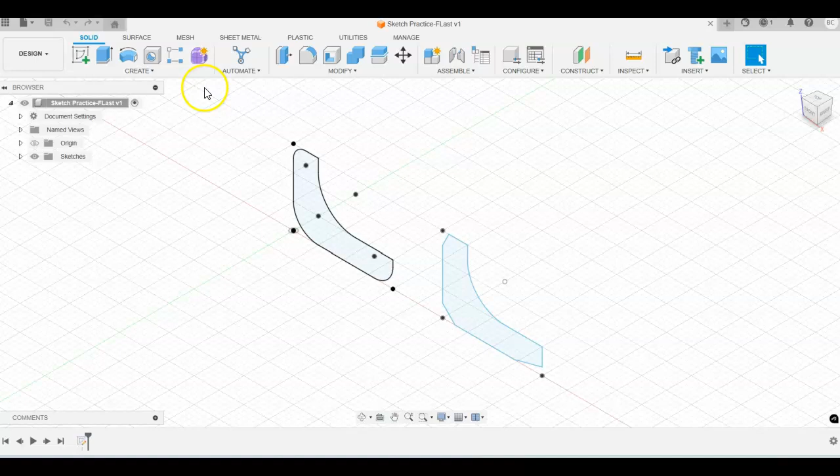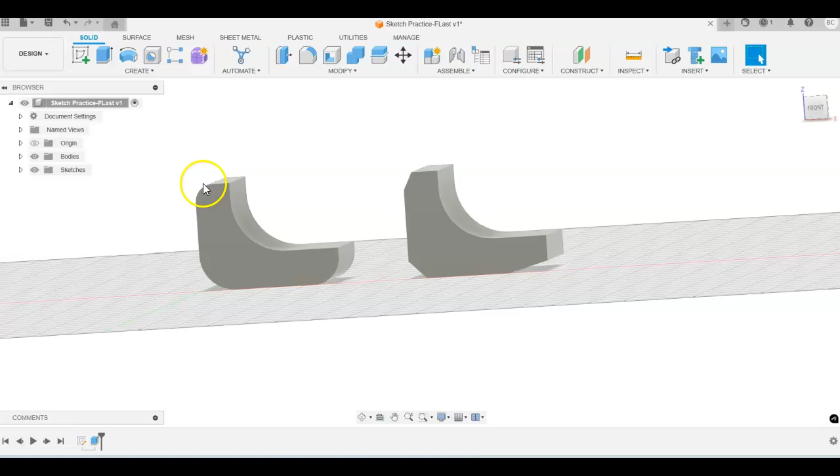So we're going to extrude these back now. We'll take this sketch practice file and extrude both of these. We'll select both and extrude them back 1.5 inches. Now I want you to notice as we look at these, the fillets and chamfers were basically copied over and became part of the actual extrusion itself.

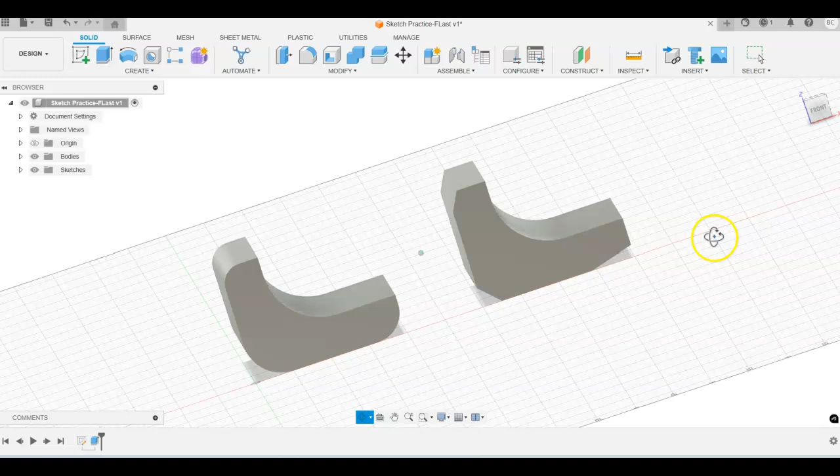So there's a bit of a difference in the way these are generated. In the past, if you needed to make a change to your solid model, fillets and radii on parts often get changed—after the part's been in service, they realize they need a larger chamfer or bigger radius for lead-in, or smaller because things got hung up from being too big. So those features on a part are frequently changed from one point to another.

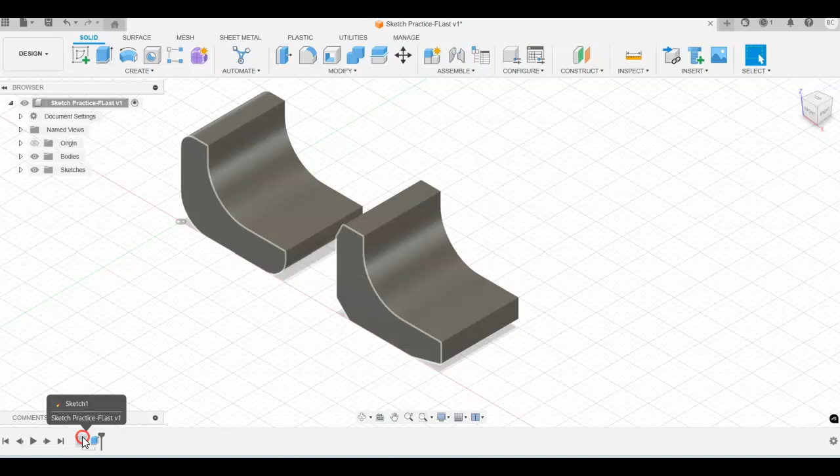So we're going to demonstrate another way to actually do this and generate this out as well. Remember, part of what these activities are designed for is to get you used to using the software package and going through all the tools. So I'm going to go back in, re-edit, and come back over here to the sketch. I'll right click, edit sketch.

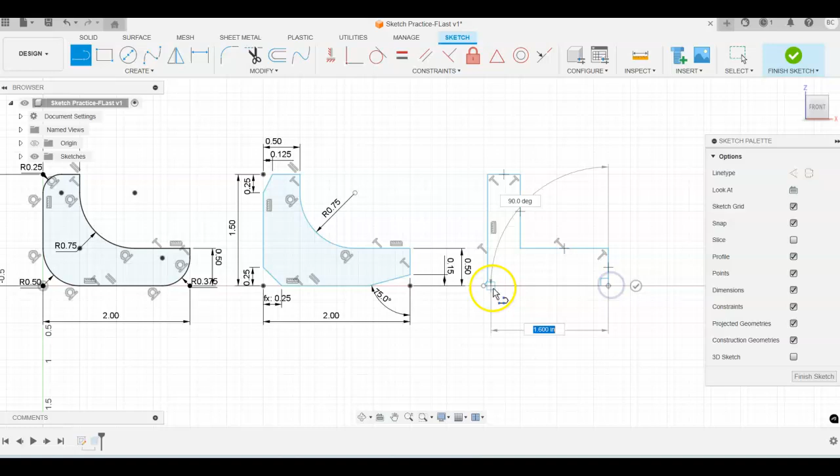We're going to create another sketch here to redo all of this. Again, I'm not too concerned with dimensions at this point—we'll just put everything in place, maintaining the construction of this. Now notice I said that, but it kind of double-lined, so not a big deal. Let's see how we can fix this here.

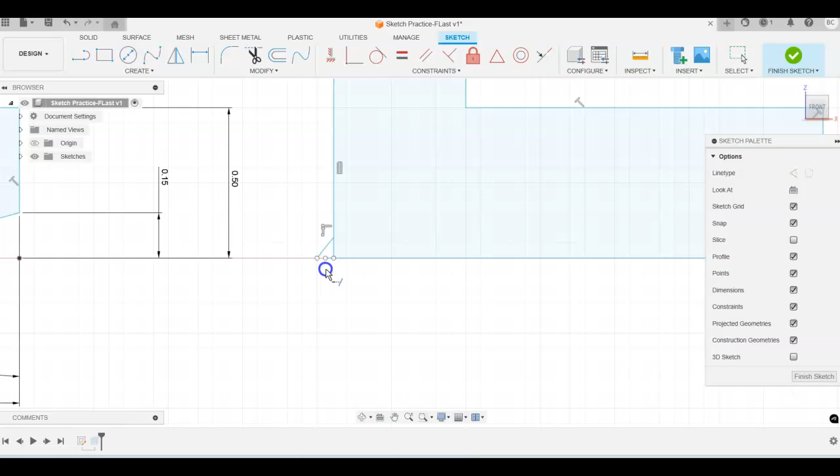I'm going to use my modify extend tool, and extend that line down to there. Now that leaves me some points, so I'm going to trim off this and that. So there's my surface using the modify extend tool.

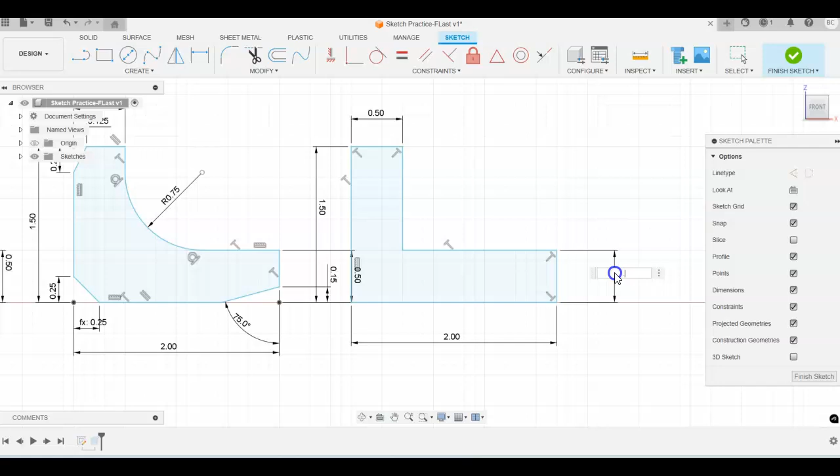Now I can go ahead and dimensionally constrain this, and we want the same dimensions. So this is going to be a 1.5 dimension, this is going to be a 2-inch dimension, and each of these are going to be 0.5 and 0.5. Okay, so we'll go ahead and finish that sketch out.

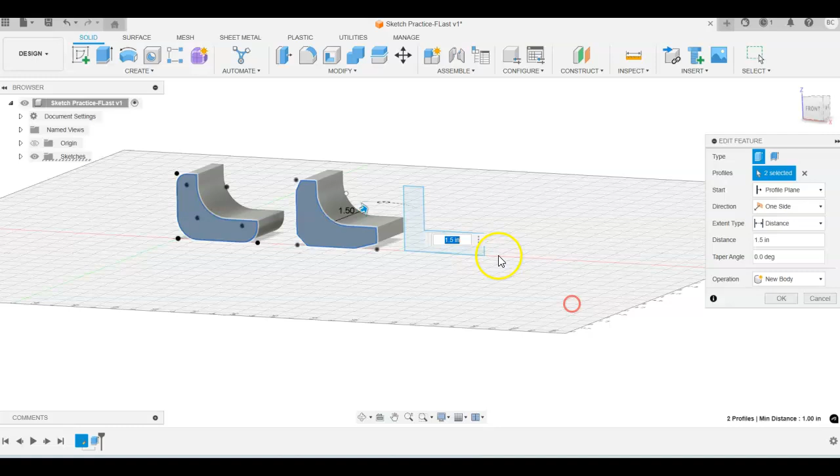Now that sketch disappears because it was part of the sketch that was consumed by the original extrusion we did a few minutes ago. So if we want that, let's go back in and edit this feature—it brings it back out. Now I can add that to the actual extrusion, and we can keep that and make it a part of it too. So now I've got these three different parts.

And you can see the differences between the 90-degree corners versus the chamfer. Now I'm going to use this one to show and do the actual chamfer tool. So let's come down here—as we take a look, actually the first thing is the radius or fillet tool.

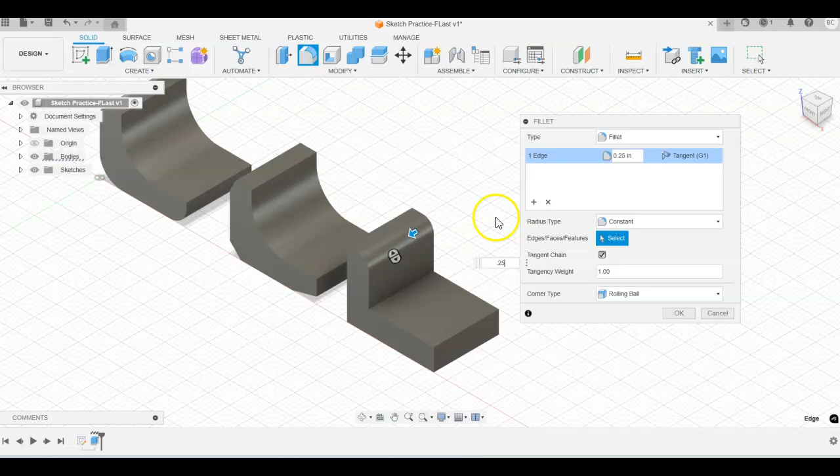So we're going to go ahead and put a fillet on each of these edges. Notice, so there's the first one—we'll go ahead with 0.25. I could do these individually, or I could do these all at the same time, either way. Let's come back down here, select fillet—each of these edges are going to be a 1/4 inch fillet. So there is the fillet tool and how we would be able to use that to make that a part of it.

Just like in our sketch tool, I also have the ability here to move and copy. In this case, I'm getting the move and copy tool right up on the modify panel. Notice when we select bodies, it gives us a choice: do we want to move components, bodies, faces, or sketch objects? In this case, I'm going to select the body and move it in the X3.

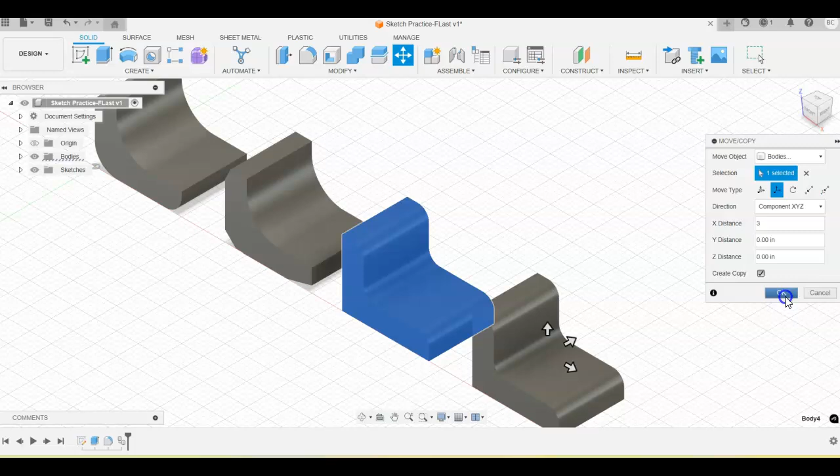I want to create a copy, so we're going to create a copy. Notice the differences here between move and create a copy. Let's go ahead and hit OK. Now I've got two of these.

Now I've got the radii. Notice this would be called a round. This would be called a fillet, because these are outside radii and this is an inside radius. So this is called a fillet, and these are called rounds. Just some standard terminology.

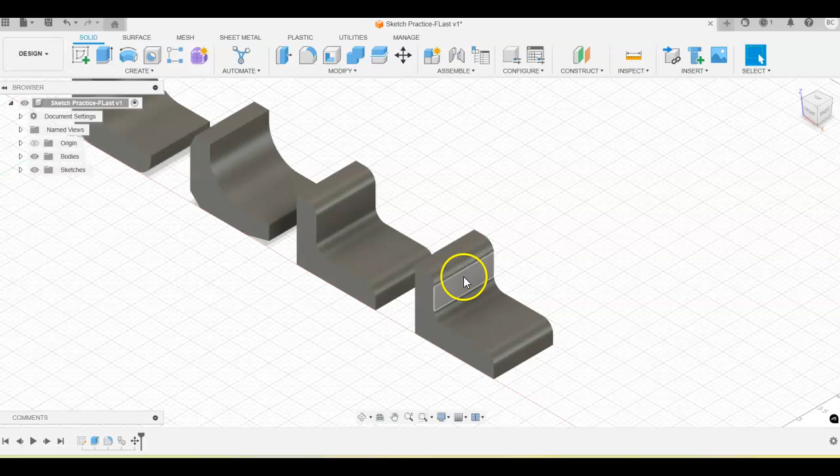Now I want to go back and create a chamfer. At this point, if I click on that feature, in this case the radius, right click, and delete, it'll take it back to the 90 degree. To put the chamfer on, it's pretty much the same thing. I'm just going to use the chamfer tool, select the edge. This is an equal distance, so we're going to make that 0.25.

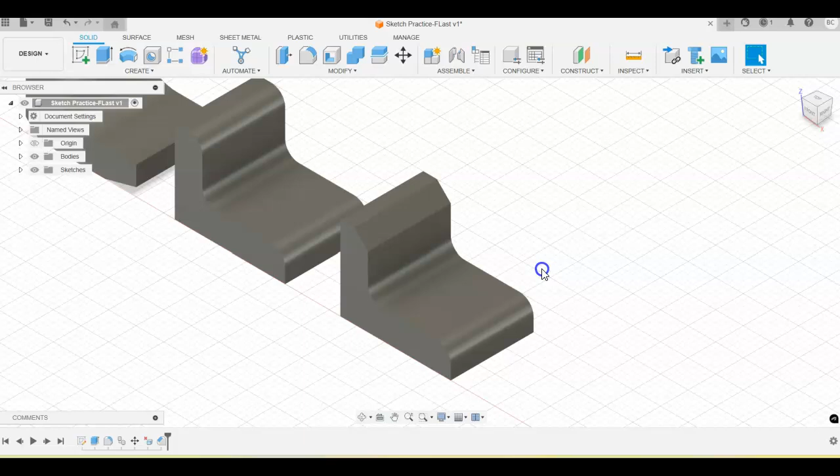There's my chamfer on it. Now I'm keeping the rest of this with the fillets here just so you can see, because we're going to use the chamfer tool one more time. Notice I can select this whole edge, and we're going to chamfer this whole edge with a 1/4 inch chamfer.

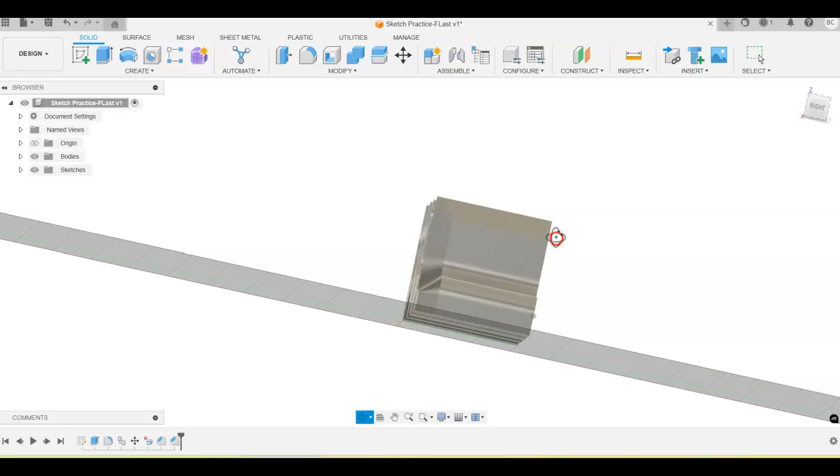Now notice, so long as I have those tangency points and I maintain that, look at the results. It's a nice smooth transition. That's a nice feature on that.

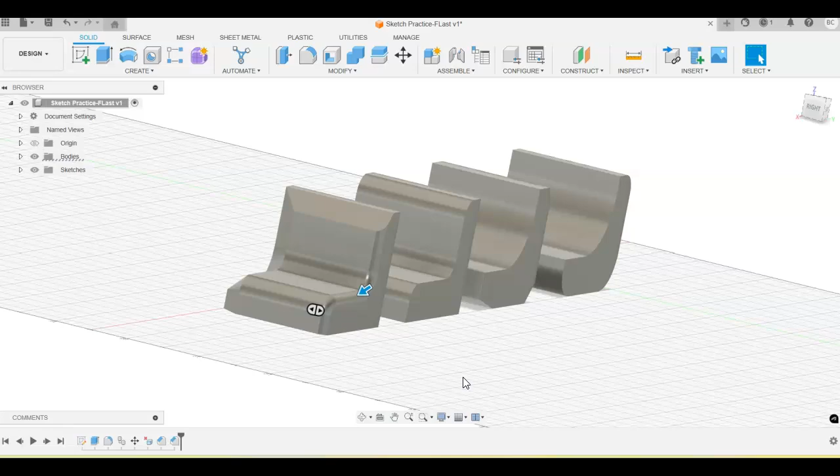The radius tool is kind of the same way. Let's go ahead with the fillet here. I'm going to select this edge for the fillet, and we're going to make this a 1/8, so 1/8 of an inch radius there. So you have that radius. Now, not only do I have the ability to do that on an edge, but these 3D fillet and chamfering tools are pretty powerful.

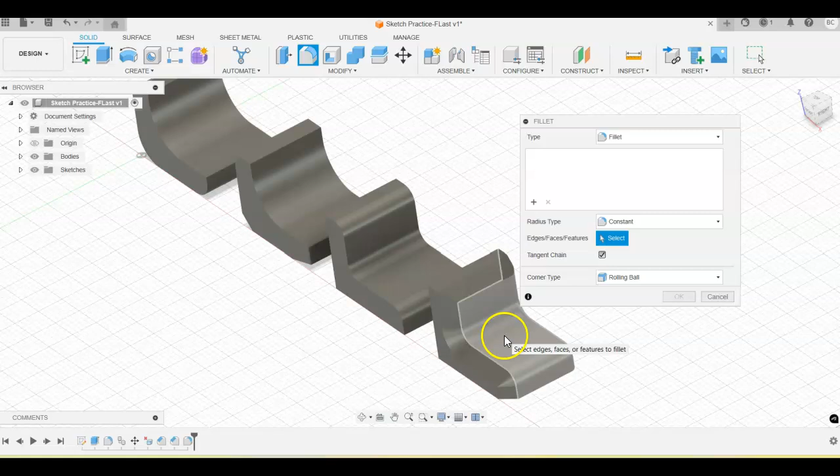If I go back to the fillet tool here, and if I select the whole surface, or what they call the face, I can also select the face here. I'm going to cancel out of this one. We're going to do this on this one back here. So I'm going to select that face.

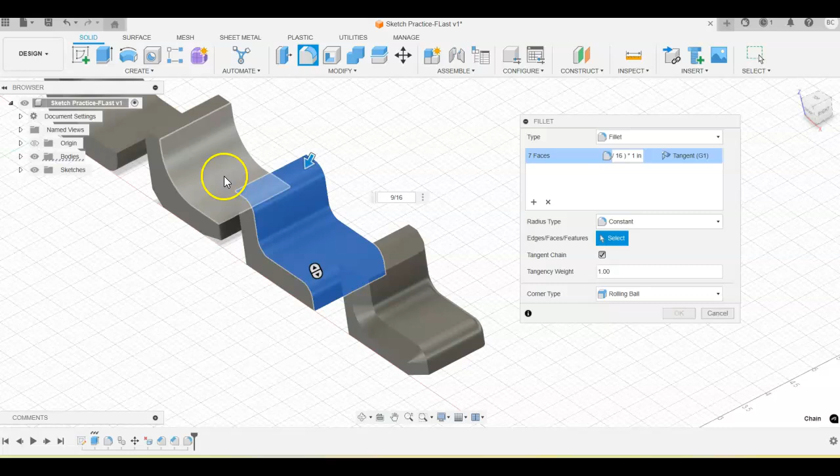Now let's say, all right, we want this to be a 9/16. Notice it didn't allow that because it was too big. Not a big deal. Let's come back. Let's make this... oops, undo.

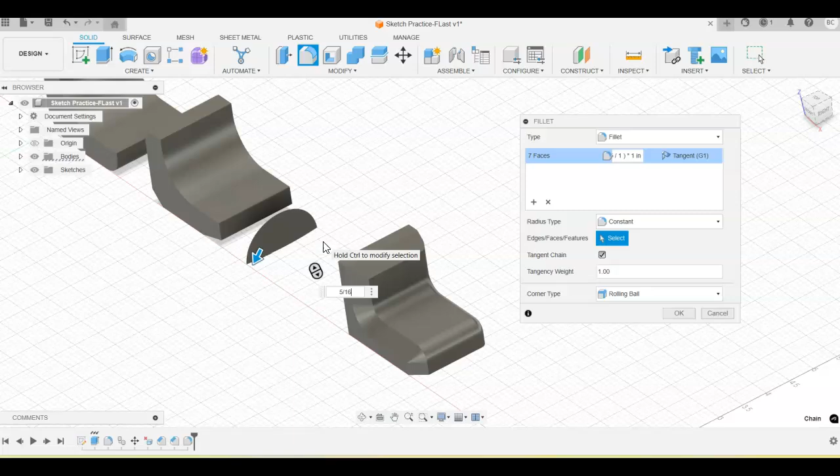So let's come back and let's make this face, if I select the face, let's make this 5/16. Notice what happens as we make that a 5/16. It generates this and we get a cool look to it.

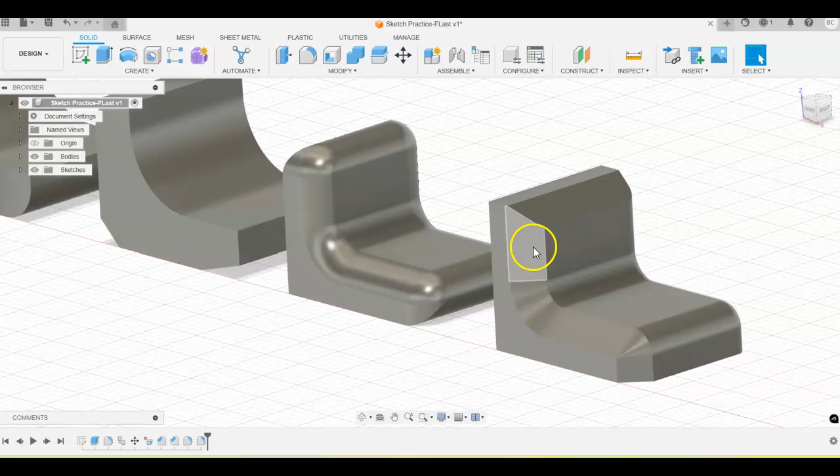So there's some neat things that can be done either using the edge or the face in our chamfer and fillet tool in the 3D modeling features here. Keep that in mind. Go ahead and practice, see what you can do with the shapes and how that can be used to give you different types of design looks on your parts when you're modeling.